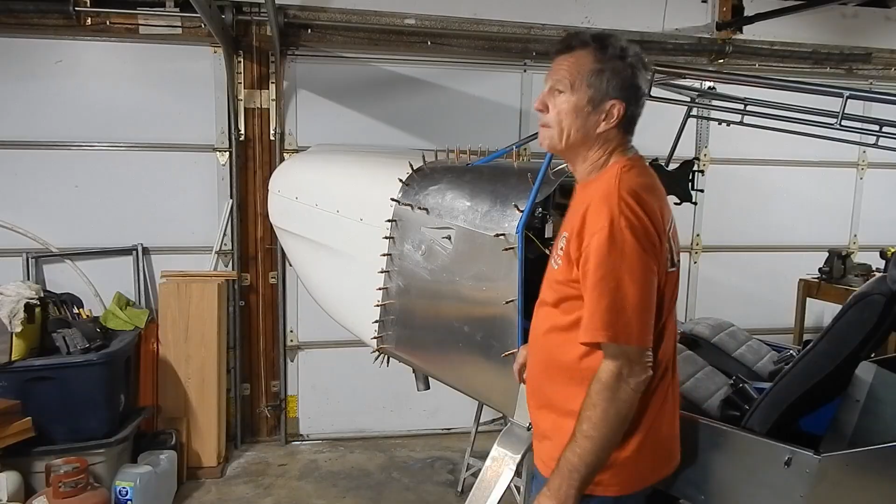This is the second episode in doing the engine cowling. I thought it was going to be a 2-episode series, but it looks like we'll need to do 3. It's fairly time-consuming: taking the cowl off, trimming, buffing, sanding, putting the cowl back on, measuring, taking it off again, trimming, sanding. It's just very time-consuming. I'll summarize my hours at the end of the video.

In the first video of this series, we worked on getting the 2 pieces of the cowl mounted to the plane, trimming it and fitting it so that it's where you want it, then securing it to the plane. In this episode, we'll spend more time with the final trim and getting the attachment hardware on. So let's jump into working on the cowling.

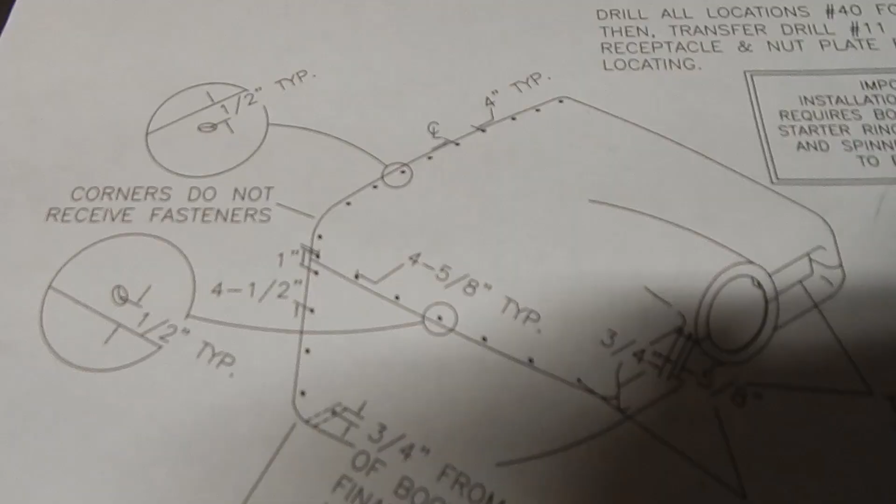It looks like our next step is to put both sections of the cowling back on and pin it with the clecos we've got. Then we're going to locate the aft holes, which are specific inches from each other and specific positions, and drill to a 40 and cleco all the way around the aft.

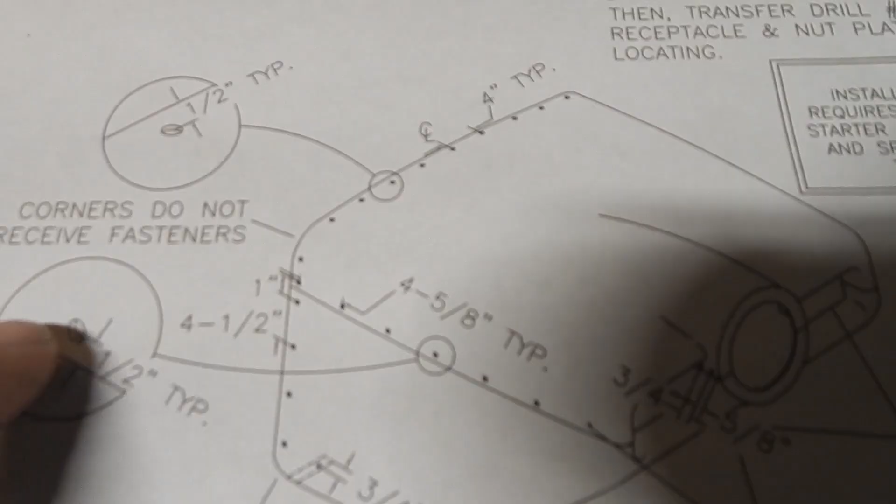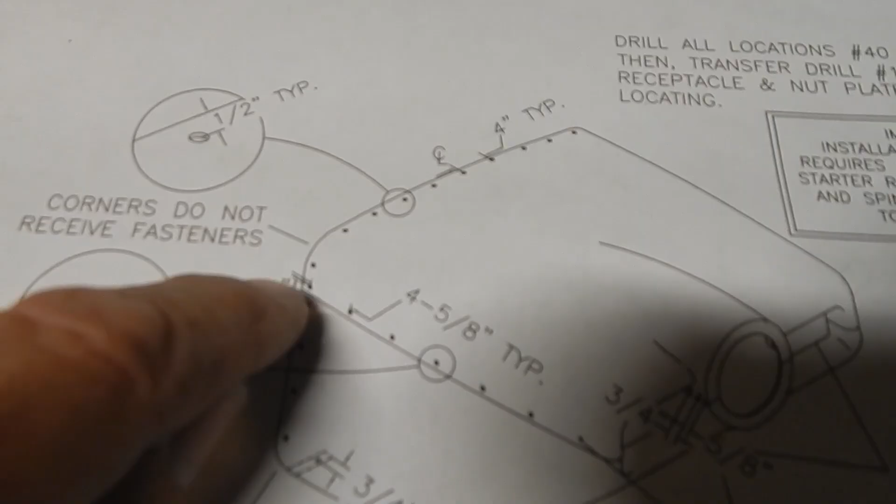It looks like the holes along here are going to be 1/2 inch up from where this meets the 2 cowlings. But you haven't trimmed this yet, so it's hanging down here. So I'm going to determine where the 2 would meet. This one's 1/2 inch up, and this one looks like it's 1/2 inch below, because there's a 1 inch gap here. We're just doing the aft holes right now, so if I get these 2 figured out, I'm going to follow that route.

I've got the aft clecos in all the way down around. These were 4 inches, nothing on the corner. This was the 1 inch between the joggle, and then these are 4.5 inches, but everything seems to fit, and I've got the clecos in.

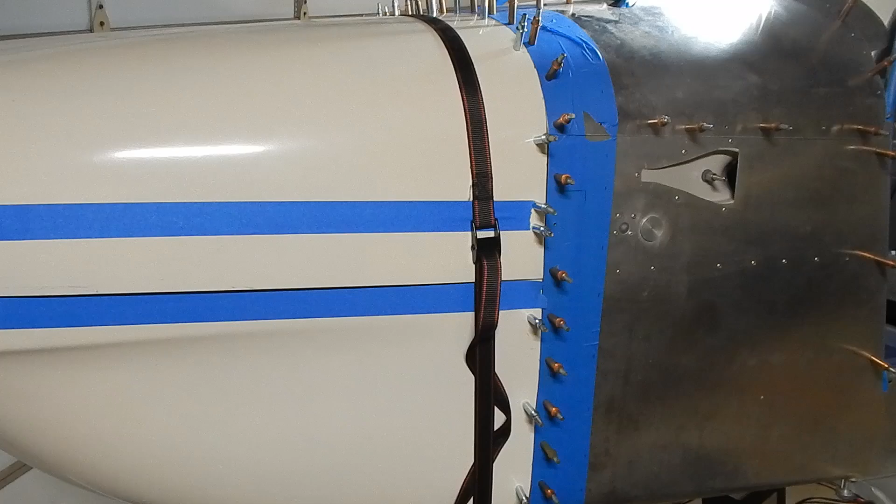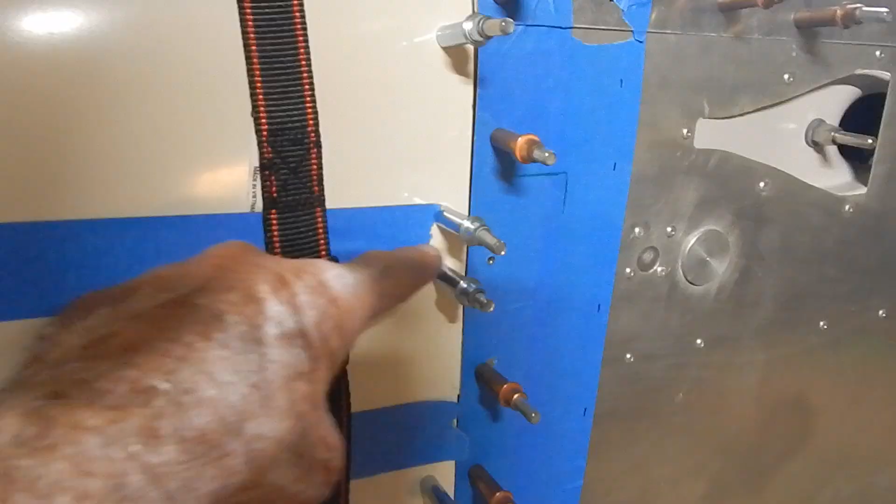I'm going to deviate from the instructions a little bit since it seems to be common sense. In between these 2 clecos is where the joggle is, where the upper cowl is going to fit into the lower cowl. They say tape 1.5 inches down from the joggle on the lower cowl, then put the upper cowl on and measure 1.5 inches up from the line to tell you where to cut to fit into the joggle. The problem is if I go 1.5 inches down, I'm still underneath this upper cowling, so when I put the upper cowling on to measure, the tape will be covered.

So I put the tape 3 inches down. Here's the edge of the upper cowling. I'm going to measure 3 inches down, put the top cowl back on, and then draw my line 3 inches up. Same principle, and it should put it right along the joggle line. But 1.5 inches won't work unless I cut away a piece first, tape, and then cut a second time, and I don't want to cut twice, so I think this makes more sense.

This is the first fitting after the cut. It comes right into the joggle here, but I've got just a slight bit too much material here, so I've marked what I need to trim on this side. On this side, I would have liked just a little bit more material. It's got a little gap, but if I close it with my fingers like this, I can close it up. So when I put my nut screws in, I'll make sure this is closed tight, so that'll hold together tight. I'm happy with this side. I'll sand both, trim the other side, and then sand them both to see if I can even the line out.

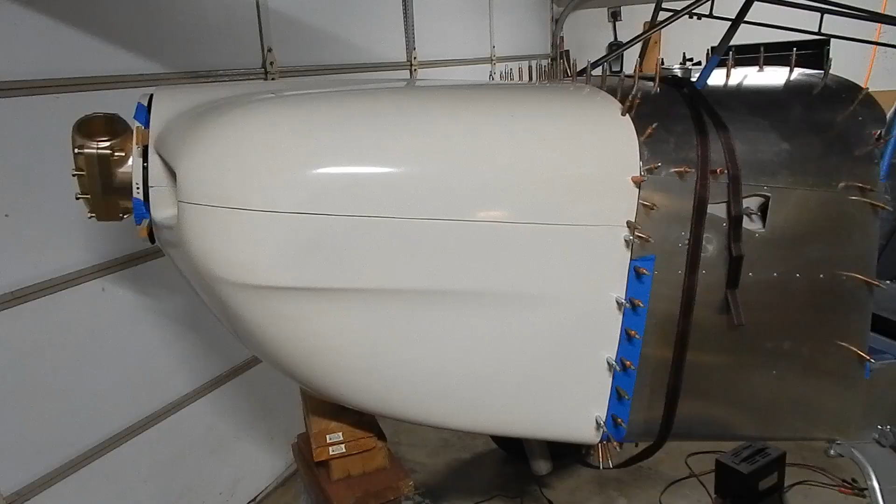I've taken off, trimmed, and replaced this top cowl I don't know, 10, 15 times, taking little bits off here and there trying to get it to fit. At this point I just have this little overhang here, but I can't figure out what I would shave to change it and fit it. Believe it or not, it's the same on this side—just a little overhang, maybe 1/8 of an inch. I hate to say it's good enough, but if I trim any more in places I think might help, I'm going to create gaps in my seams. You can't put material back, obviously.

So I think I'm going to move on, and the next step is to mark and set your nut screws. I'm just going to have to say good enough and hope the Oshkosh Lindy judges don't notice that. I'm kidding, I'm not going to enter it in any builders contest. I'm just excited that I can get a bird flying.

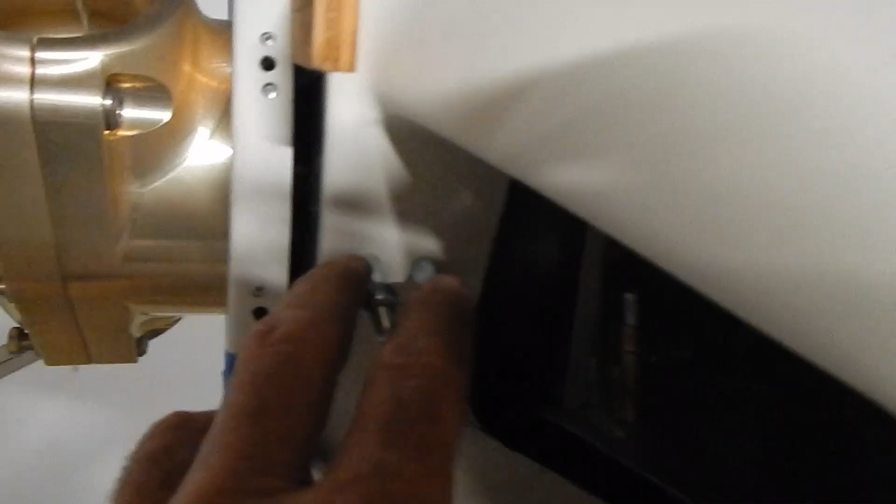The next step was to mark and drill and Cleco with number 40s. These are 4 5/8 inches apart. These two come in—it's 5/8 inch back, 3/4 inch spacing between them, and 1/2 inch up, same around the other side. I did notice as I was pushing down, the manual says this has to get trimmed as you fit. It had to get trimmed a little more to fit in here kind of snug. So you just keep taking it off, trimming it, and marking it. That's the next step.

I just watched Derek Kenny's video on this part of the cowling. He's clearly a better builder than I am, more precise, more patient, and he does a really nice job. So take a look at his video series.

Two things I noticed he did: where I had this little lip here that I said I'm just going to have to live with, he spent the time sanding the material here and on the inside. He sanded the outside material and the inside, which enabled him to push this whole thing back a little, meaning his trim was a little different. But he did this all before he set that center Cleco, which sets your distance, and that enabled him to get rid of this little overhang. He had the same problem where I couldn't figure it out—he did.

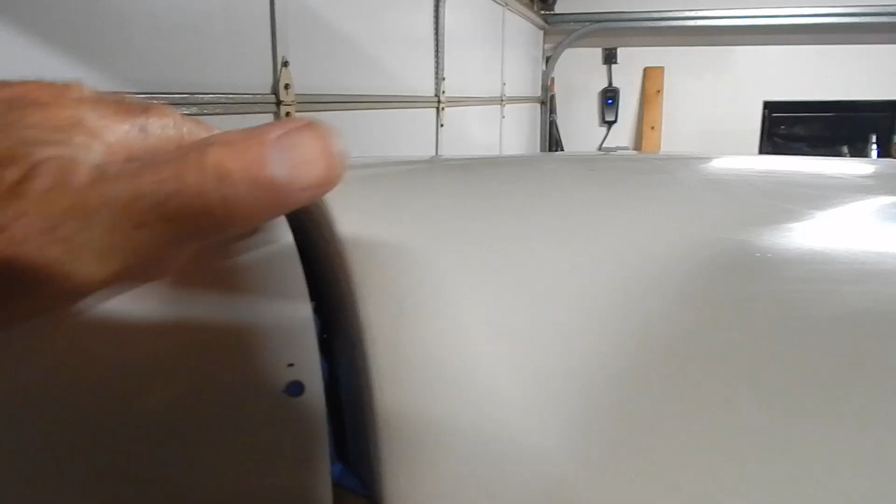The other thing is with my spinner on, I've got a little bit of a ridge here. This is probably—he mentions the motor's probably going to settle a little on the mounts after you run it, which is going to leave a little drag here. His top cowl piece is pretty flush with the top of his spinner, and again that's before you set your center point—cut your material to bring it down a little more flush. So I really like how clean his cowl is, and this is already set, so that's something I'm going to have to live with, and hopefully that's not going to be too much drag and affect my flight characteristics much.

The next step is to transfer drill all the holes to a number 11. Eventually these holes here get stepped out even larger than an 11, except these two and this one and the one underneath, which remain a number 11 because they're going to take a panhead bolt rather than the quarter turns that these take. But right now they all go to a number 11 for the next step.

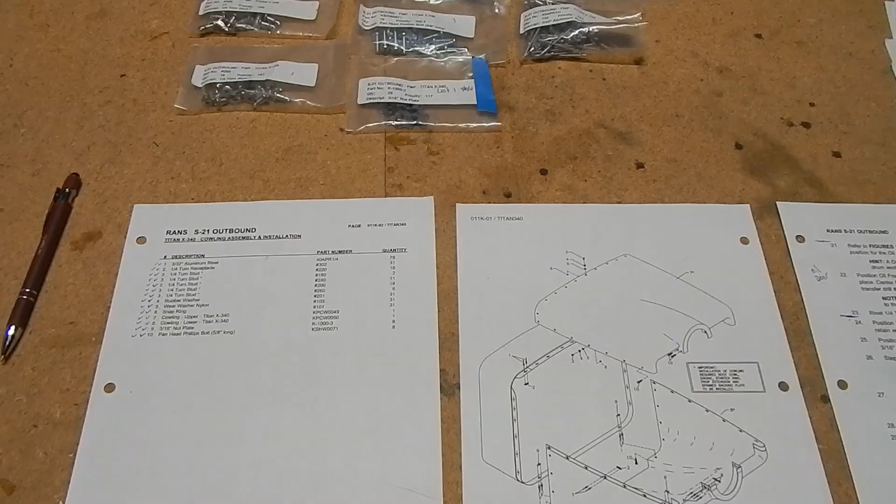In starting to attach the cowling, you get your parts and hardware. You've got a bunch of these different turn studs at different sizes—there's like 5 of them—and then some miscellaneous hardware. The first step, it says—I'm skipping the oil door because I'm assuming that can be done at any time, I'll do that a little later. I'm going to kind of follow a modification on that.

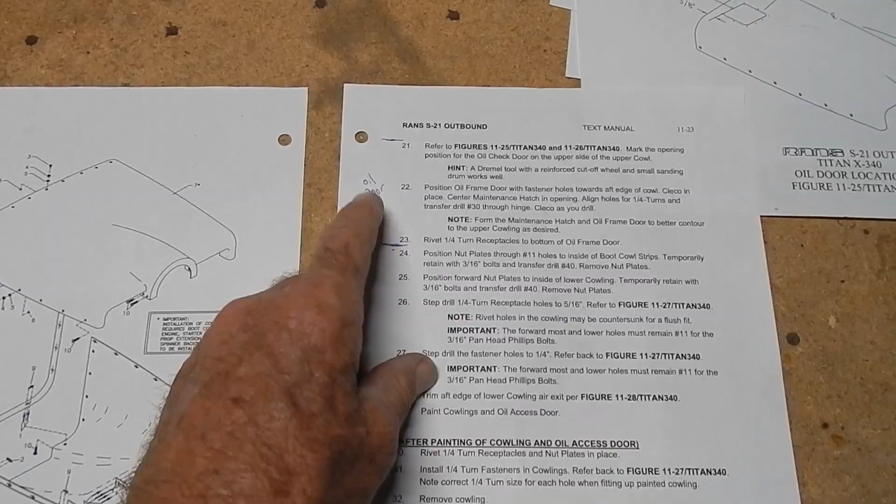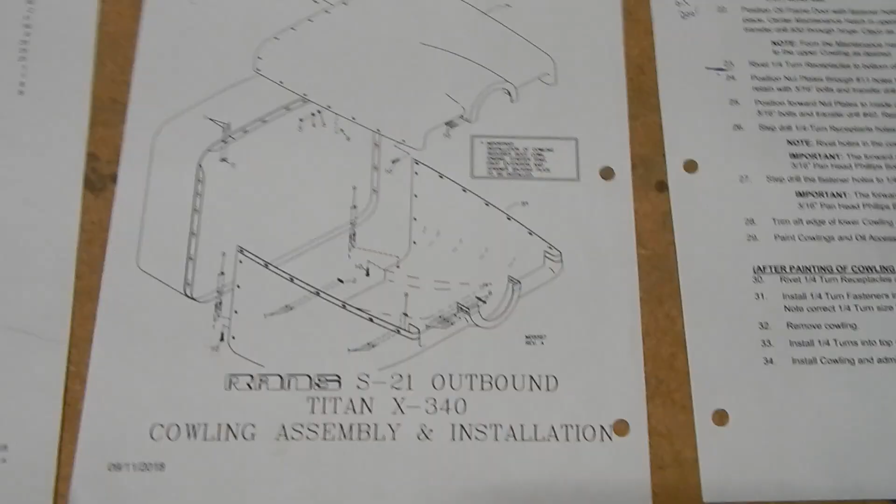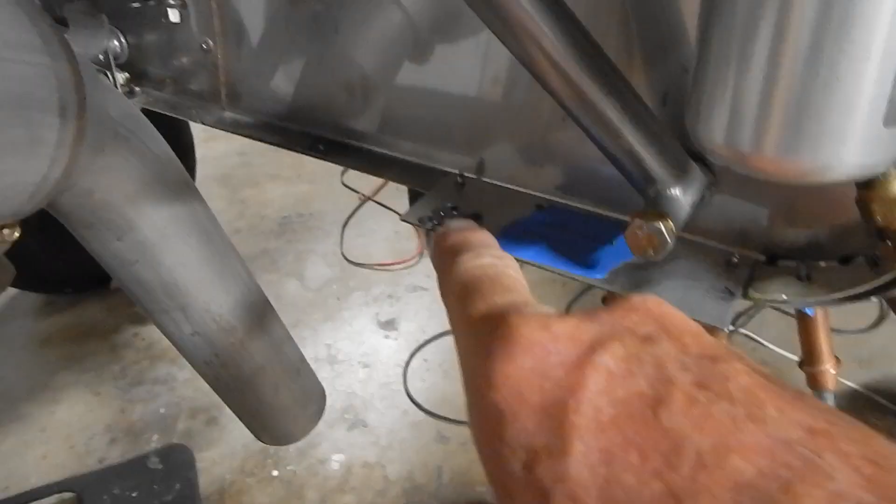But the first thing is to position the nut plates to the number 11 holes. Now you only have eight nut plates, and that's because you've got 3 each up front on either side, and then 1 each on either side at the bottom aft side of the cowl. Remember, that's where those panhead bolts go, and everything else is going to get a quarter turn stud. So it says to start with these 2 back here, line up the nut plates and get those attached. If you've gotten this far in the build, you have set a lot of nut plates, so I'm not going to spend a lot of time on the detail as far as putting the nut plates in on the strips and then again on the forward cowl section.

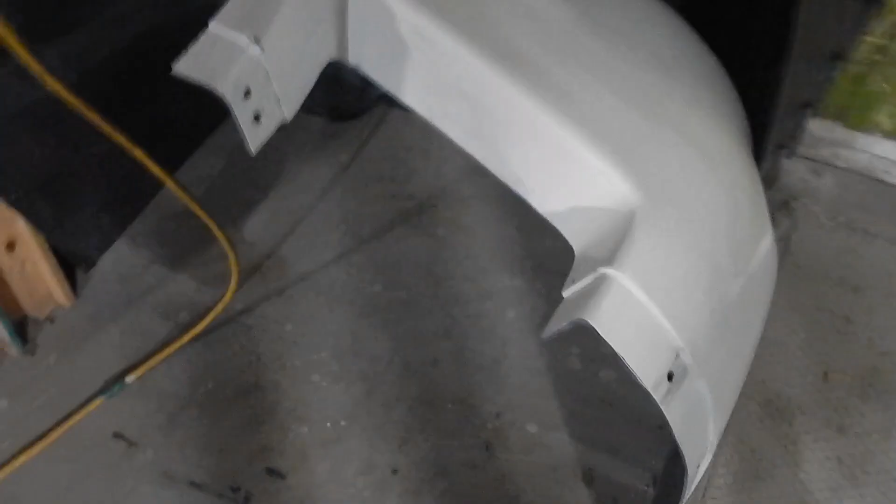After you get the ones done on the boot cowl strip, you get the 6, 2 and 1 on this side, 2 and 1 on the other side of the nut plates into the lower cowl.

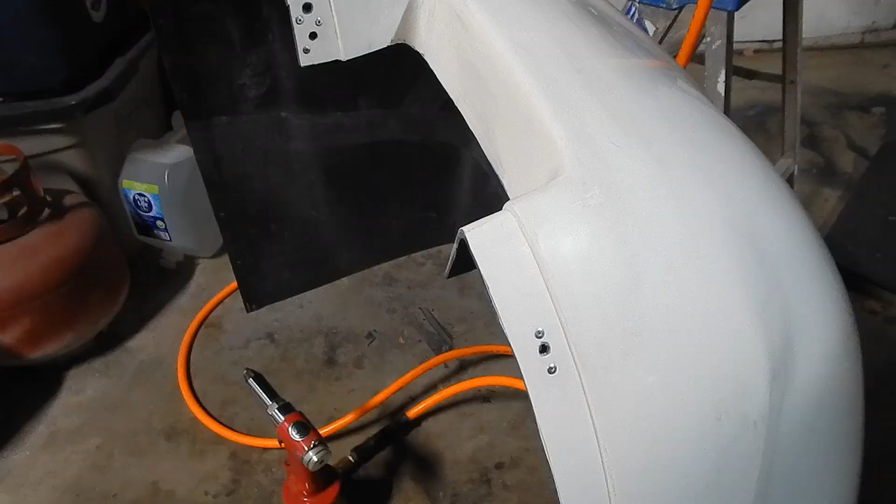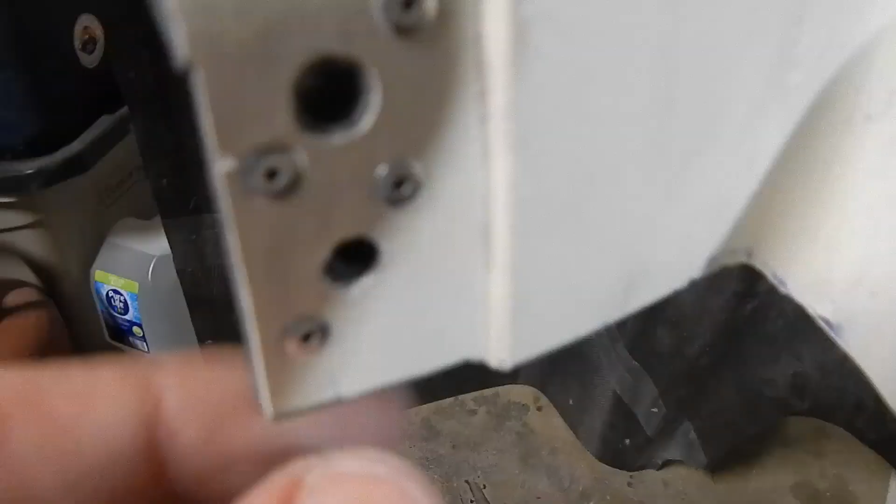Okay, these 6 are done. I did countersink them just a little bit to make that flush. The manual says it's optional, but it seems like that's a touch point to make them flush. The only caution is you've got some curvature right here, so as you put these in, you balance. If you come down too far this way, you get this one too close. If you go up too far, the nut plate ends up on the curve and not flush. So it's just common sense when you put them in to have them flush on the backside.

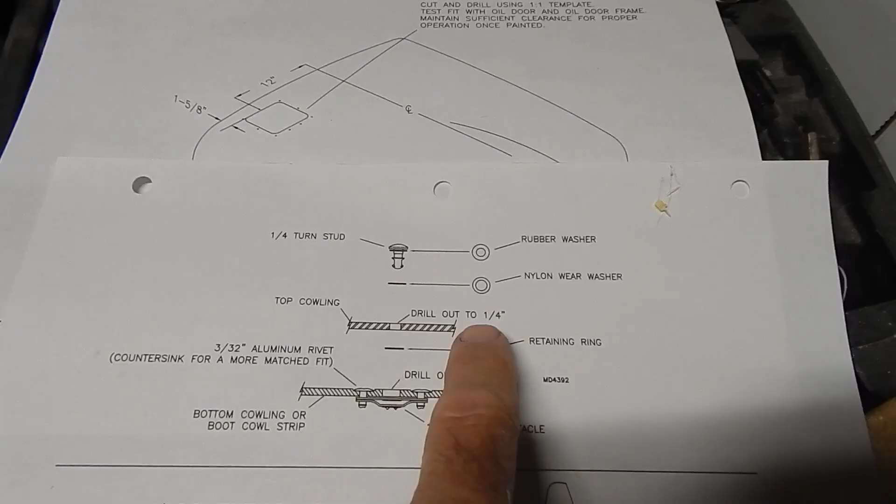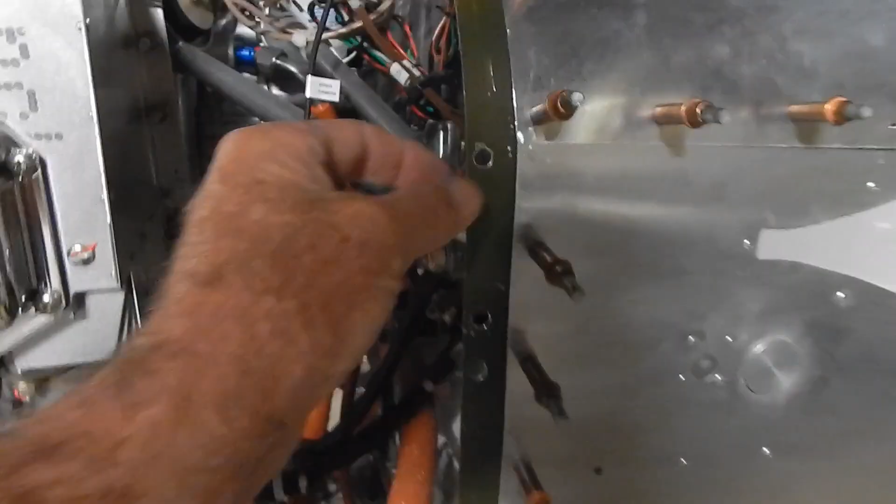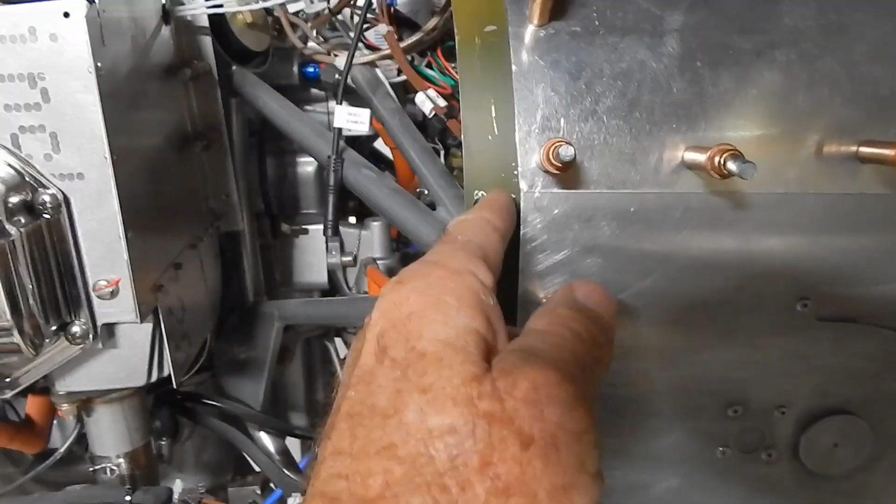The receptacle holes get drilled out to 5/16, and the turnbuckle holes get drilled out or stepped up to 1/4. These are the receptacles, kind of odd looking things. One warning I'd have is I'm drilling out my holes along here to the 5/16 for the receptacle, and that's a little closer to the edge than I would like. So when you measure that 1/2 inch, if you haven't done this already, it's really like 3/8 of an inch, not half, but this is solid material. I would just prefer to have it about 1/8 of an inch more in towards the joggle. But these all get drilled out to the 5/16, and then 1/4 on the side that's going to take the turnbuckle.

I wanted to get one done so I understood how the whole thing goes together. You drill this inside hole out to 5/16, and then put the receptacle in there with the typical small rivets. Then the outer hole gets drilled to 1/4, and these turnbuckles go in, but there's all different sizes and no instructions. I tried putting one at 220 or 200 and it wouldn't latch. So this is a 240. It's got thicker material here than up here, and this one goes in kind of snug. I didn't put a 260 in to see if it was loose, but I'm guessing if this is snug, this is how you determine the size.

Getting that little clip on the back is a pain in the butt. I lost one of the washers. Hopefully they give you a couple extra. Otherwise it's on the floor somewhere and I just couldn't find it. So I did put a big piece of cardboard down to hopefully catch it next time I put it on. But that, I guess, is the process all the way around on where the cowling connects to the strap.

So picking out these 1/4 turn buckles is interesting. They give you different lengths - 260, 240, 220, 200 - and sometimes you put them in and they don't click, they're too short. Sometimes you put them in and they're a little bit loose, too long. They all seem to be going through one layer of material. I know on the cowling this area was a little bit thicker, but a 220 worked here. And then I've been putting 200s down here, but just because that seems to be what fits. There's no rhyme or reason.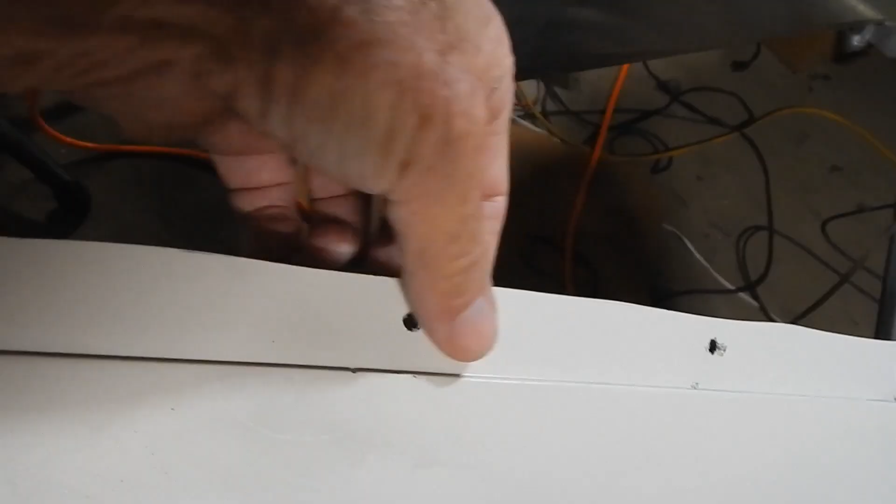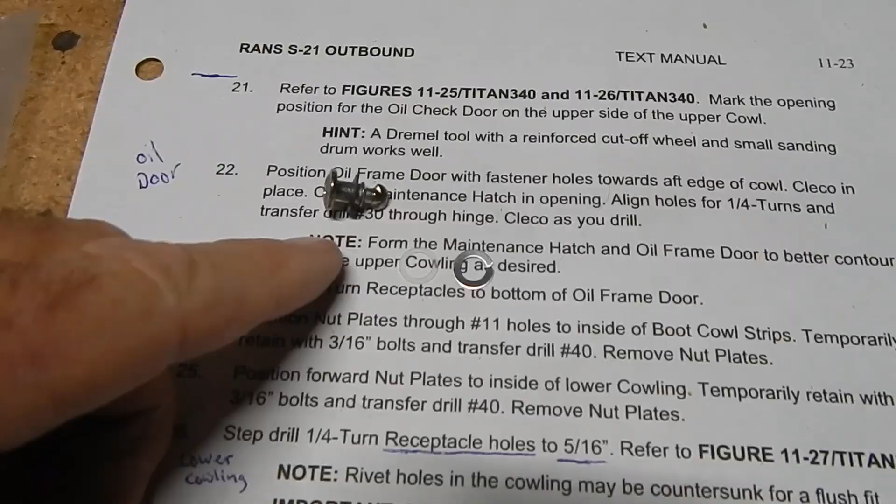Now these up here coming along the edge are going to go through this cowling, the other cowling. Oh, and that's it - there's no material along here, just the two cowlings, but these are both pretty thin. So I don't know, it's trial and error as I go through. And these things are hard shit to put on. You put the little rubber gasket on, you put this invisible ring on. These things, I've lost them right here on the table, they come out, you can't even see them. They're like translucent.

And then getting this stupid clip on, there's got to be a trick to it, but it's hard. I struggle with each one. I kind of rip my fingers up putting each one on. So it's going to be a guessing game when I get to the end.

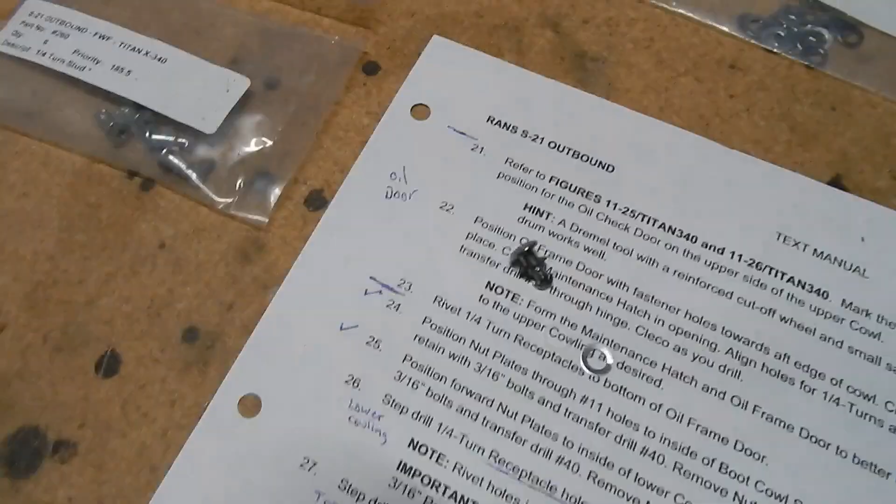I can't imagine what I'm going to use these 260s for. It seems the 200s are real popular. I've only got 4 180s, so there must be some real thin things somewhere. I don't know where I'm going to use those. But at the end, I think some other builders have said that they never have the right number of the right sizes, and they have to order additional ones. So we'll see where that goes.

But this is just a matter of drilling out these holes to 1/4. No, these are the 5/16, and the others are 1/4, and then finding the right, put the lock nut in, the rib nut, the lock nut, screw nut. Oh, what the hell are they?

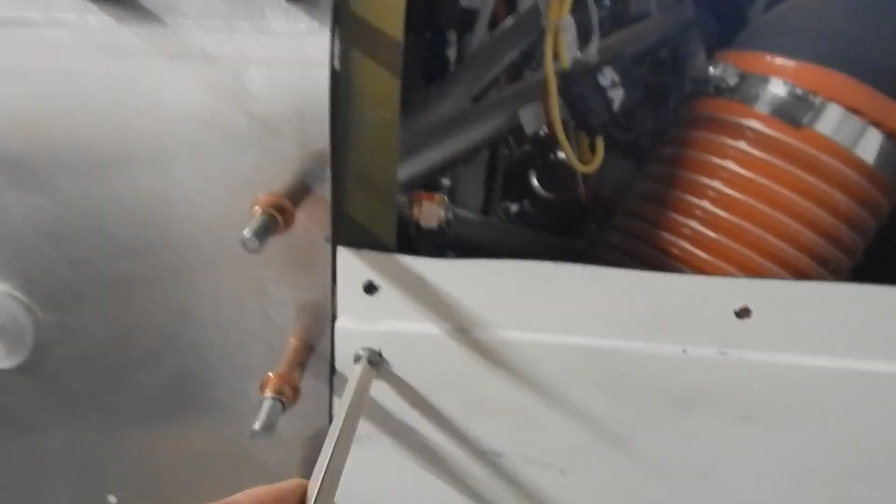So here's an example of what I'm talking about. I'm going to do this with one hand, I think. This is a 200 down here, and it just turns in nice and tight. It goes in. There's no play. But this 220 I put up here, it's not going to lock in. It's loose, so it's not too long. But now it's not long enough to get in there and grab.

So this was a 220. I'm going to now put a 240 in and see if that works. But it's just trial and error I think. There's no chart that says this is what you ought to be using, that I know of.

Well, I asked where I would use the 260. That's a 260. Went in there nicely. The 240 wouldn't close. The 260 worked just fine. I think that's because the material here is a little thicker before it goes into the joggle. So there, I used up one of my 260s.

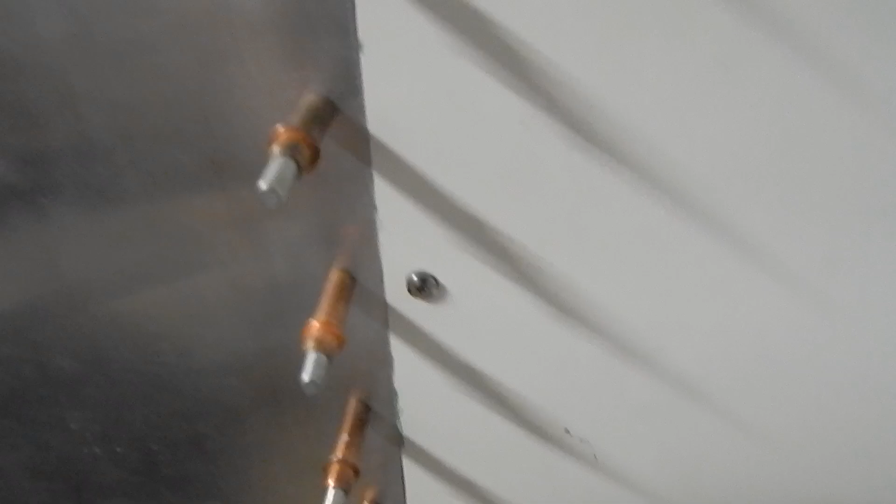I'll pass on one trick that seems to work: when you're setting the screws for the first time and determining the length, you can set them in and test them before you put that backing nut on. That makes it easier if you have to take them off and change sizes. That little ring in the back's a pain in the neck. But this way I sized them, found the right size, and now I'll take them off and put the ring on the back. So that seems to be a little bit faster than my other way.

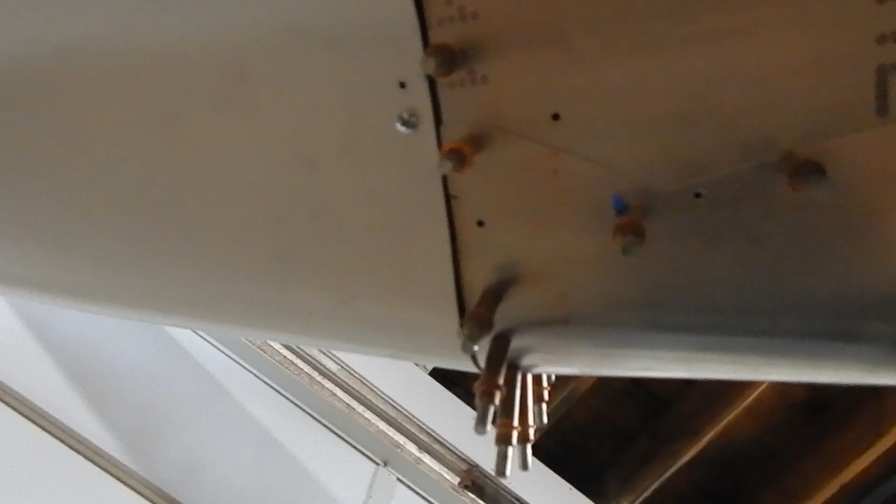I'm back under my plane looking up at the bottom. And remember, this is a nut screw, not a quarter turn buckle. And I've got a little bulge here, and that's just part of when I fit it, it didn't fit perfectly. I think I'm going to put another nut screw right here. If I put a second one in, I don't like the pressure on this one. And I think it'll give me a little tighter fit and a little more security.

So I'm going to stick a second nut screw, not a quarter turn, but a second nut screw right here. So there's two, and that'll push that up and hold it tight. And I still have a little gap, but not much. And it's under the plane, with the flow of the air, so I'm not going to worry about it.

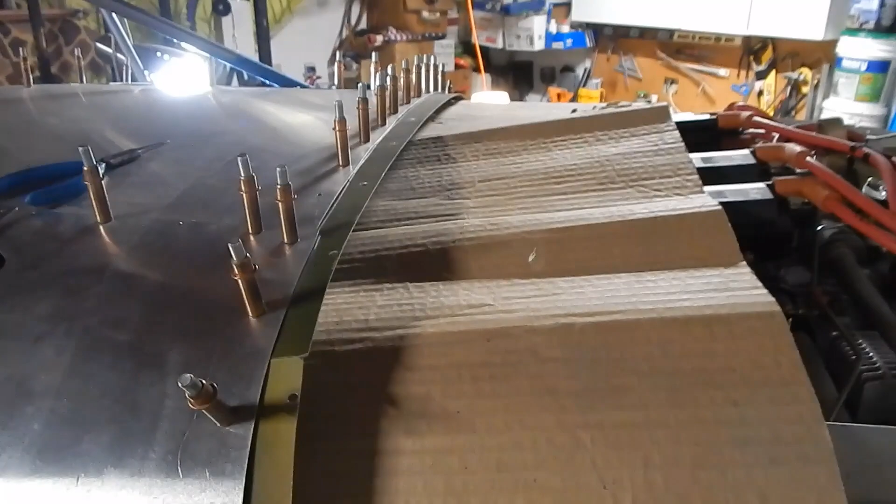The aft part of the lower cowling is done. All the turnbuckles are in. Now I'm going to work on the top cowling. I put a little piece of cardboard in there to catch all the drill bits so they don't go down into the engine. And I think I'll start from the middle and work out, then I'll work on the cowling attachments after I have it done up top first.

Well, that's a good place to cut it off. That segment of the build took 15.9 hours. That brings my build to date to 1,390.1 hours. I have finished the cowling, so I've got the content for the next episode. I'll get that out shortly, and in that episode I finish up with the attachments and get the oil door installed. And that wraps up the cowling.